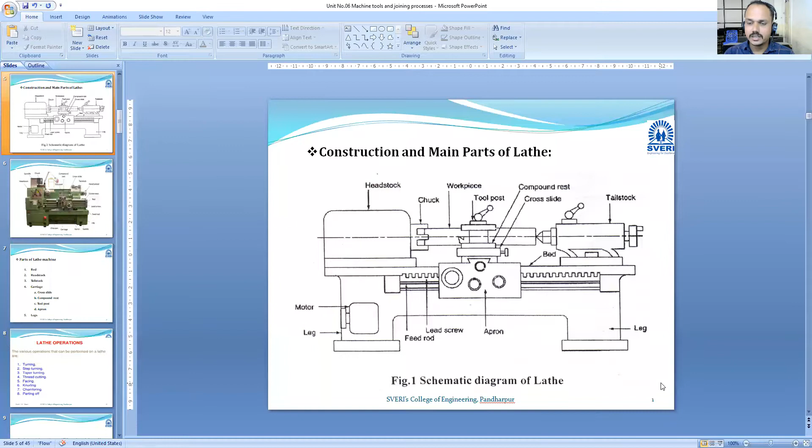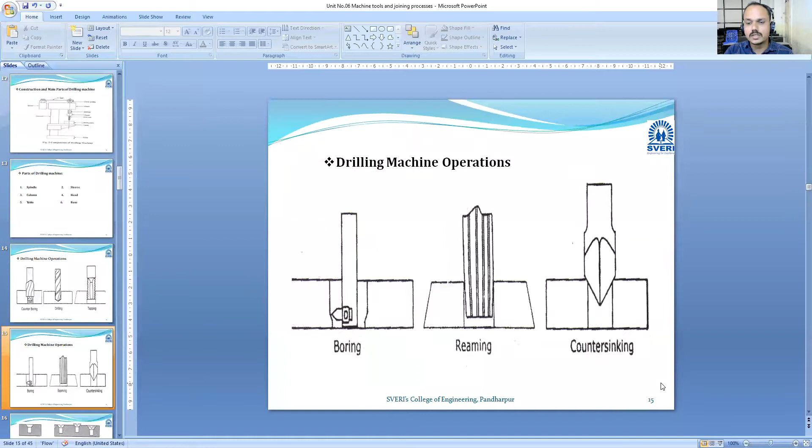Okay, so we will proceed. This is the lathe machine that we have studied. These are the operations which can be performed on the lathe machine. This one is now the drilling machine. These are the operations which can be performed on the drilling machine.

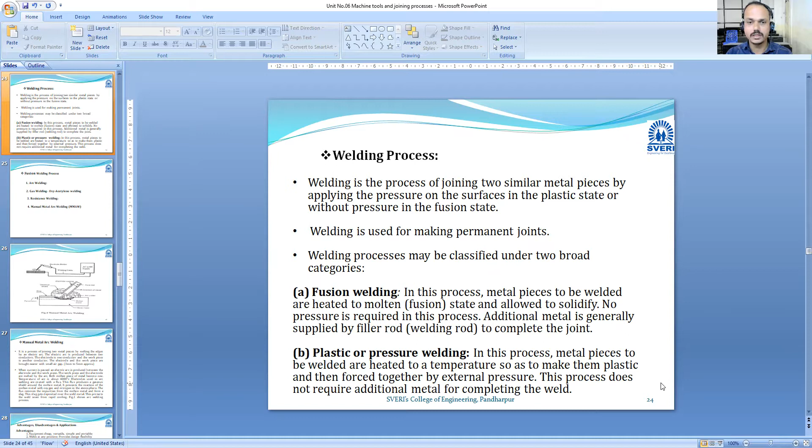Milling machine is not for our syllabus. Then in joining process we have seen welding process - there are two types of welding: fusion welding and plastic welding. In fusion welding there are two main types of joining - the first is arc welding and the other is gas welding.

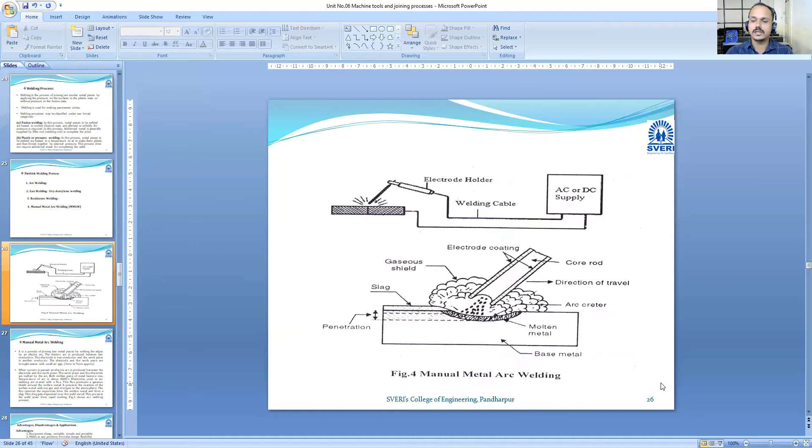But if you see here in arc welding and gas welding, we melt both the workpiece and filler metal also. Is that correct? Yes sir.

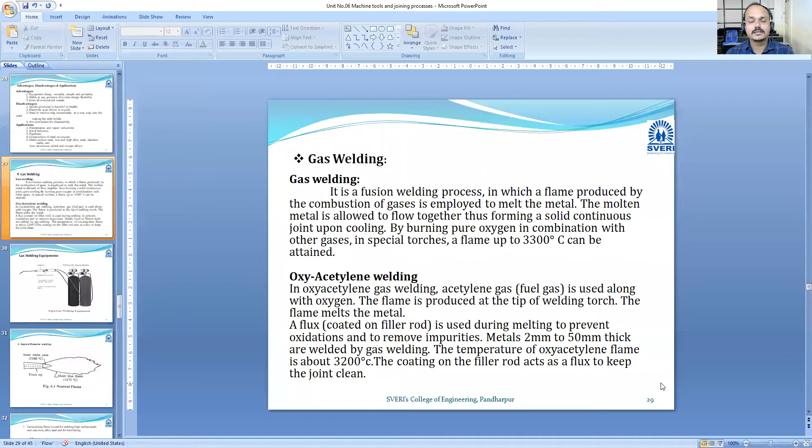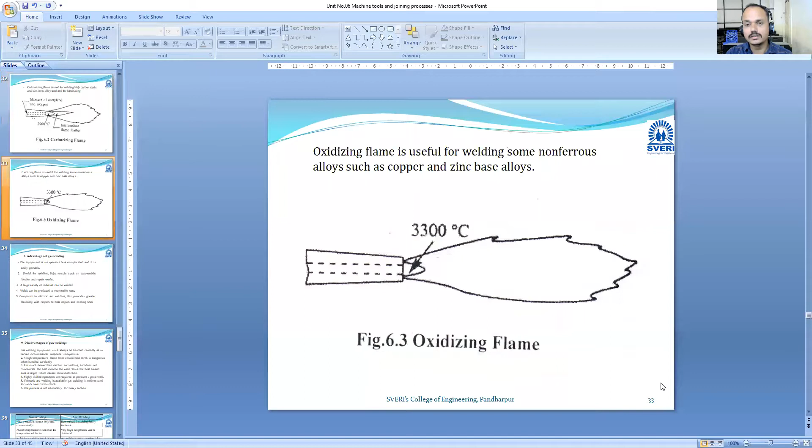So this is gas welding - mostly acetylene is used as the gas to burn. Then these are the advantages and disadvantages.

Now in the previous lecture we have seen one more welding process. What is the name of that welding process? Resistance welding. Yes, resistance welding, very good.

So resistance welding is one type of welding where we are not melting the workpiece, and we are not using filler metal also. Filler metal means, in arc welding we use electrode as filler metal, and in gas welding also we use filler metal. In these processes we melt both workpiece and filler metal.

But in resistance welding, we supply current through the electrode, and by inserting the workpiece or sheet metals in between the flow of that current, it creates resistance, and due to that resistance the sheet metal converts into a plastic state, and by applying pressure we can create a joint.

But this type of resistance welding is not as strong compared to arc welding and gas welding.

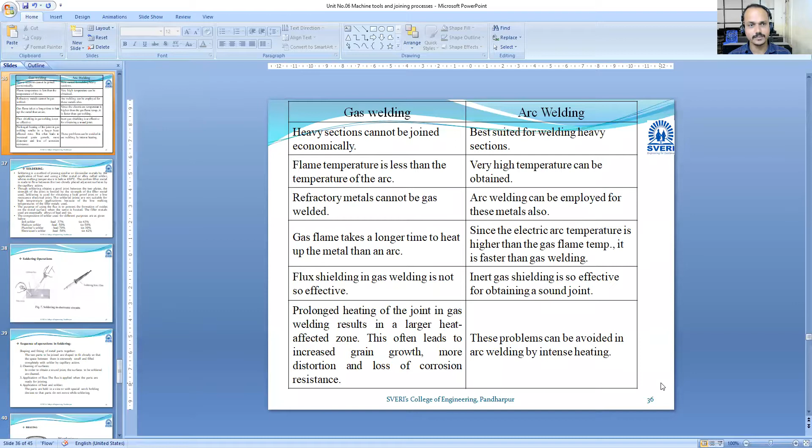Now the next welding type is soldering. Why is soldering required? For example, if there is arc welding and gas welding, why is soldering needed? Because for small workpieces, or for non-ferrous metals like aluminum which has a very low melting point, or mostly in electronics, for example IC circuits, integrated circuits.

To join these circuits, we require to make some dots. There are elements like condensers, resistors, capacitors - small devices which work, and we connect them with the integrated circuit.

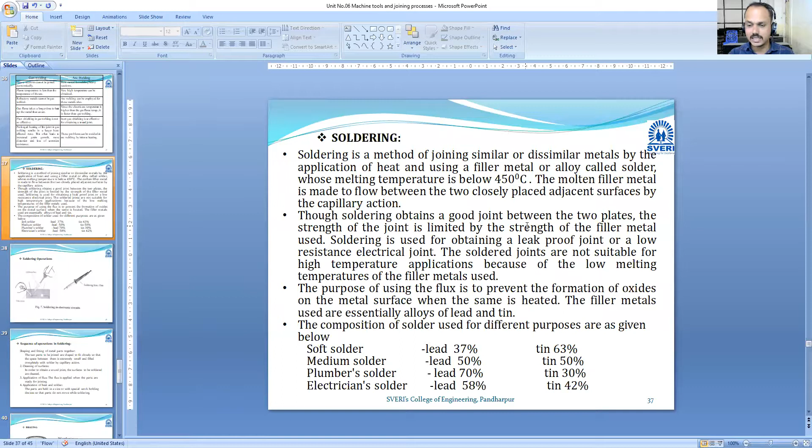Flux is also used here to prevent formation of oxides, but it is not coated with the filler metal like in some other processes. Here flux is not coated on the filler metal, we have to apply it separately on top. Sometimes it is applied, sometimes it is not, depending on the process we observe.

So you can observe here, this one is the soldering gun. This soldering gun is connected to electric current, and this is the switch. When we start this switch, current flows through the electrode and the electrode gets heated.

When I touch the end of that electrode to the wire - this is the filler metal - if I touch that filler metal, the wire gets melted, and then I can put this melted filler metal, suppose between two plates that need to be joined, so these two plates get joined.

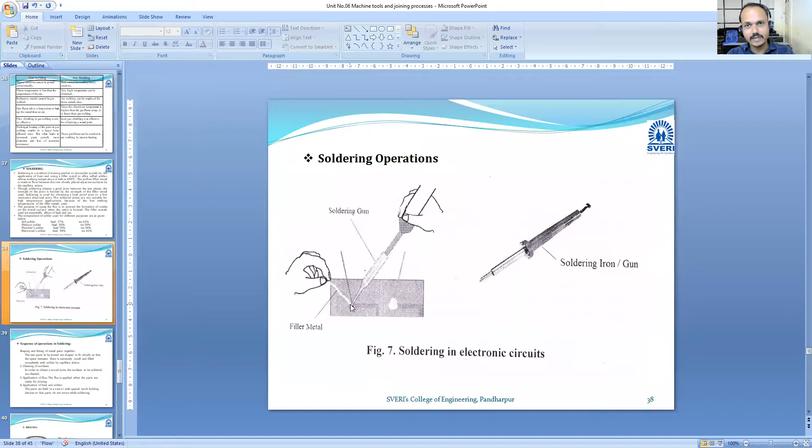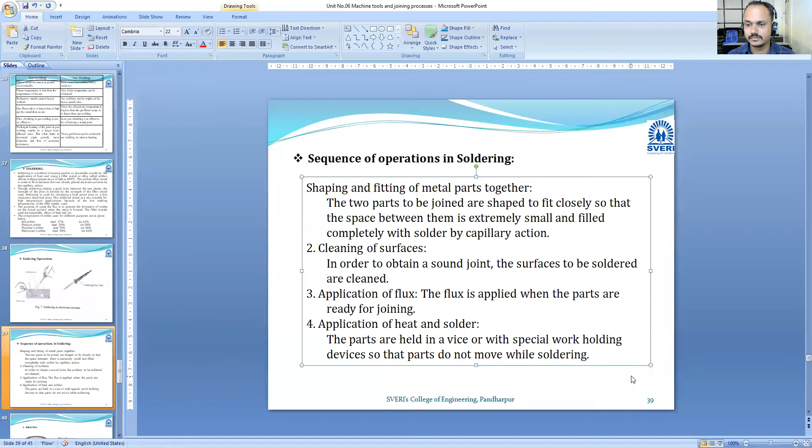Now, after soldering, one more process is there, that is brazing. Brazing is also a process of joining two metals. This brazing is similar to gas welding, the working principle is similar, but it is also used for small joints.

For sheet metals, here also we are not melting the base metal or the workpiece, we are melting only the filler metal. But the joint we get after brazing is stronger as compared to soldering.

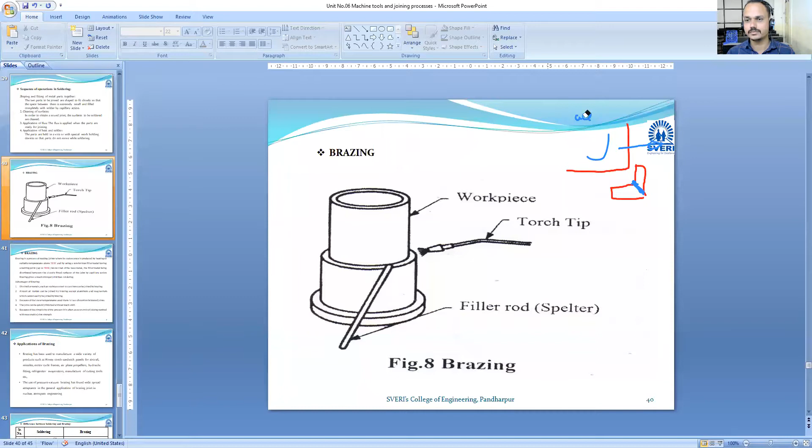Why is it not joining? Because of the properties of that material, they do not join easily with the help of the brazing process. Because of the lower temperature used, there is less distortion in the brazed joint.

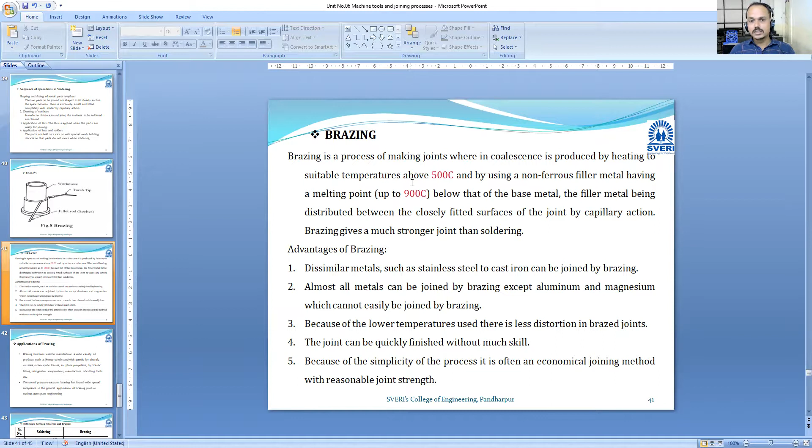So these are the applications of brazing process. It can be used mostly related to sheet metals, products such as honeycomb. Honeycomb म्हणजे मधमाशांचं जे पोळ असतं, त्याच्याप्रमाणे ज्या पेट्या बनवतो आपण मधमाशासाठी.

So we can use this in missiles, in motorcycle frames, airplane propellers, hydraulic fittings. In this process we can use brazing process. There are a large variety of brazing applications, but some are given here.

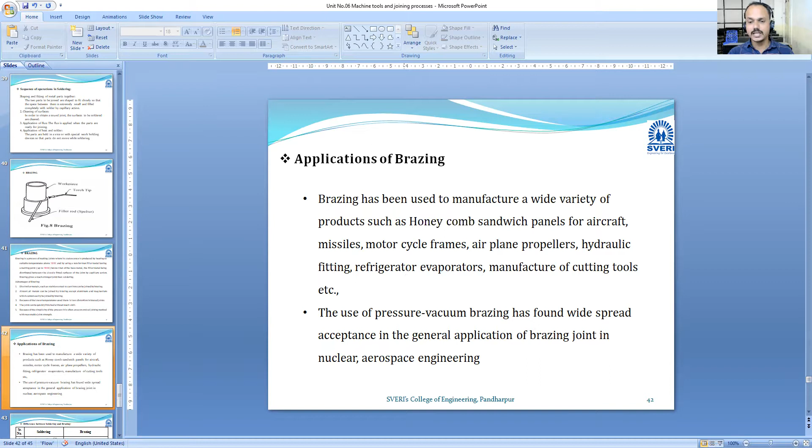Many times what happens, I observe that if I ask if you understand, all are saying yes, but when I ask them, nobody is ready to react or give an answer.

So we will see videos on that, so you get more understanding. This is the comparison between soldering and brazing, that we will take up afterwards.

See, very important thing is that if you do not understand, you have to say I am not understanding, sir. This is the way of learning. If I don't know, I'll say I don't know. We are not God, we are not at a very high IQ level, we are common people in a learning mode. So don't hesitate to ask questions if you don't know - it's not related to BCME subject only, for all subjects.

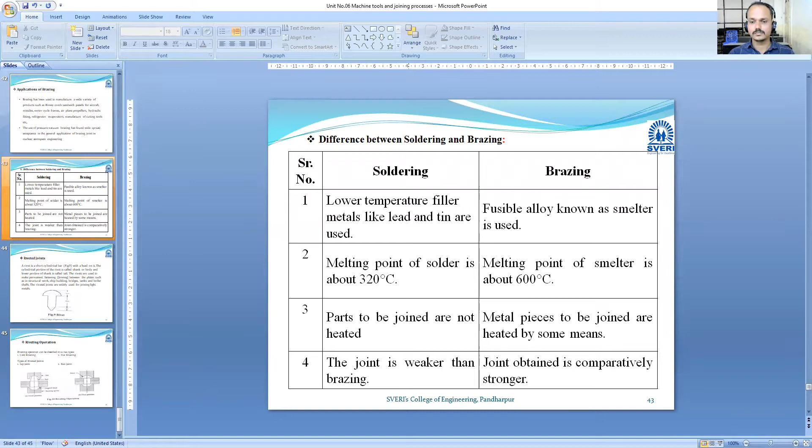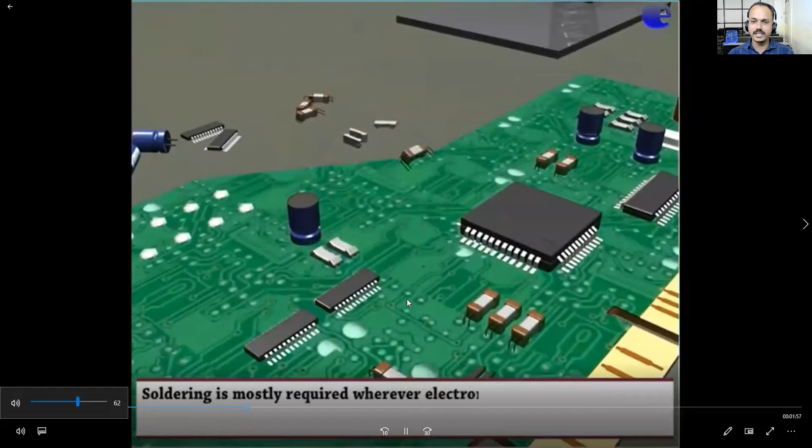So welding, here soldering - first we will see soldering and brazing animations. These are all the equipments. This one is the solder or filler metal. Here we have soldering iron, this is the electrode, this one is the stand. This is an IC circuit - हे सर्किट आहे, त्याच्यामध्ये वायर सारखे पॉइंट्स दिसतात जिथं होल्स दिलेले आहेत, जिथं आपण कॅपॅसिटर, रेजिस्टन्स जोडू शकतो.

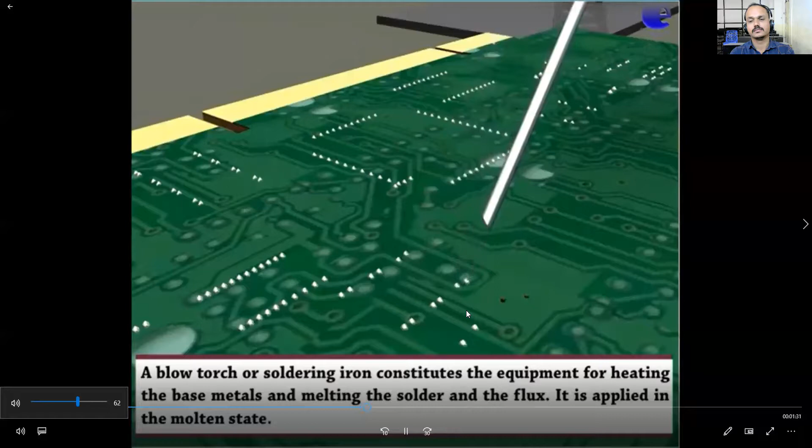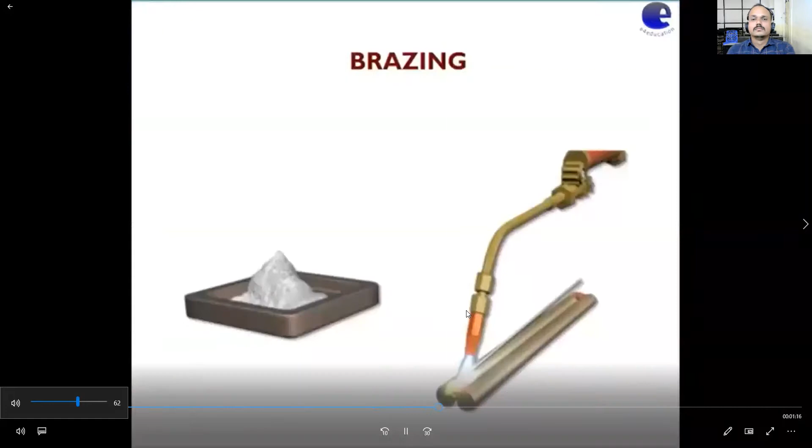This one is the brazing process, torch brazing.

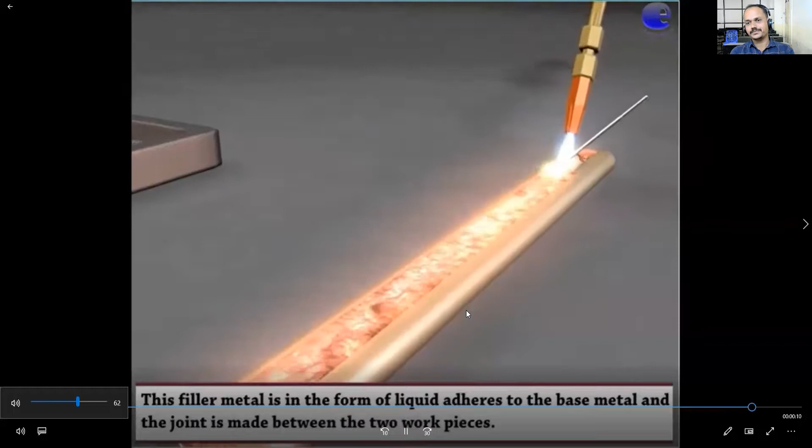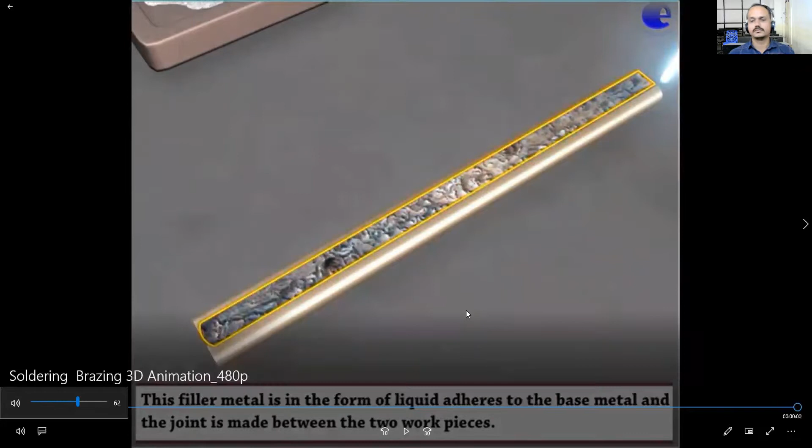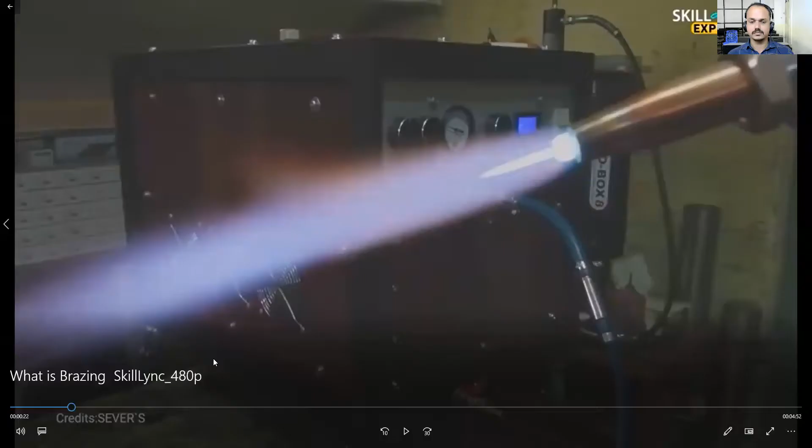समझला? Yes sir. We have one more video on brazing.

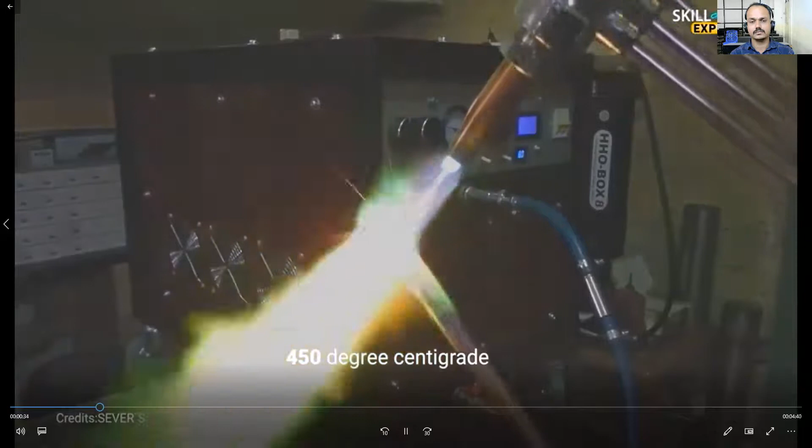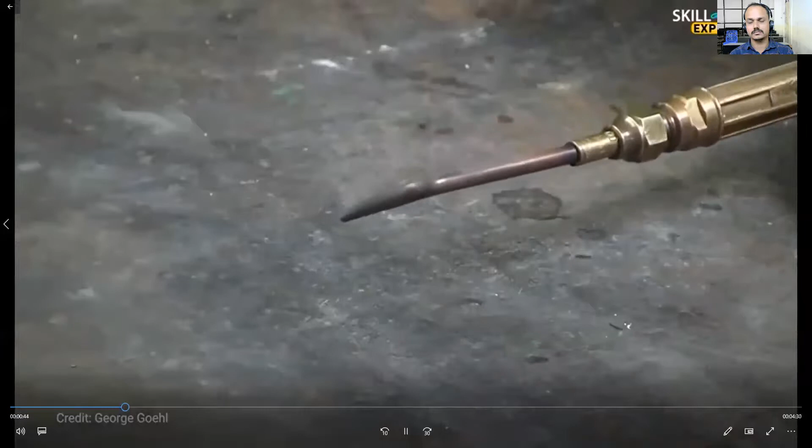Brazing, the filler metal, which is also known as the brazing metal, has a melting temperature above 450 degrees centigrade, but it is below the melting point of the base metal. There are many types of brazing generally available, each with a specific application. The first type we will be talking about today is torch brazing.

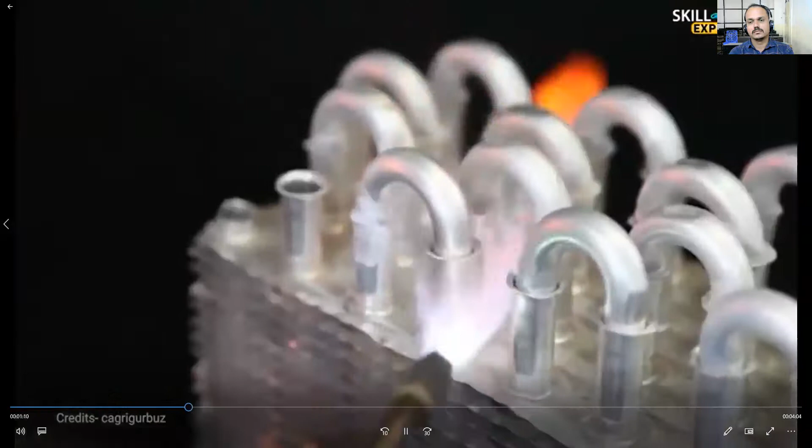In torch brazing, a flux is applied to the surfaces to be brazed. A torch is used to direct a flame against the workpiece and towards the joint. An oxygen-starved flame is typically used to prevent oxidation on the workpiece. Once the joint areas reach suitable temperature, the filler wire is added. Due to the high temperature, the filler wire melts and creates a joint.

The torch used in brazing is similar to the ones used in gas welding. The fuels used in the torch vary based on the type of workpiece and filler used. Acetylene is used if the filler or workpiece has very high temperature tolerance, as acetylene burns at almost 3000 degrees centigrade. Torch brazing is mostly performed manually.

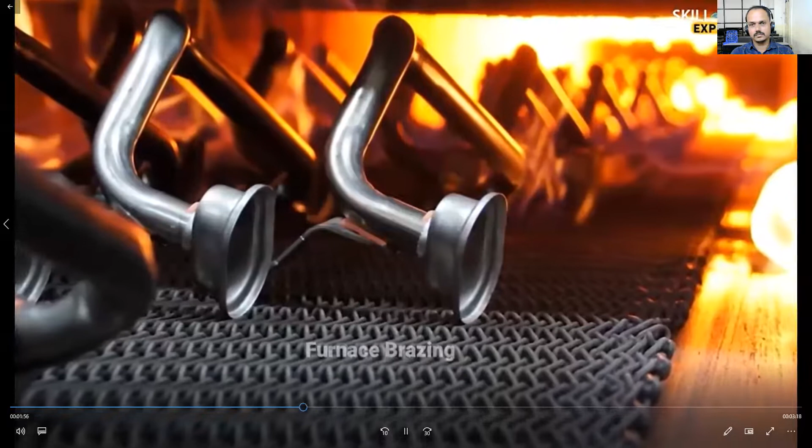The skill of the workers is crucial, as they must be employed to control the flame, manipulate the handheld torch, and properly judge the temperature of the flame. This is done to ensure a proper joint is obtained. Next is furnace brazing - in this type, a furnace is used to supply heat for brazing and is used to mass produce parts.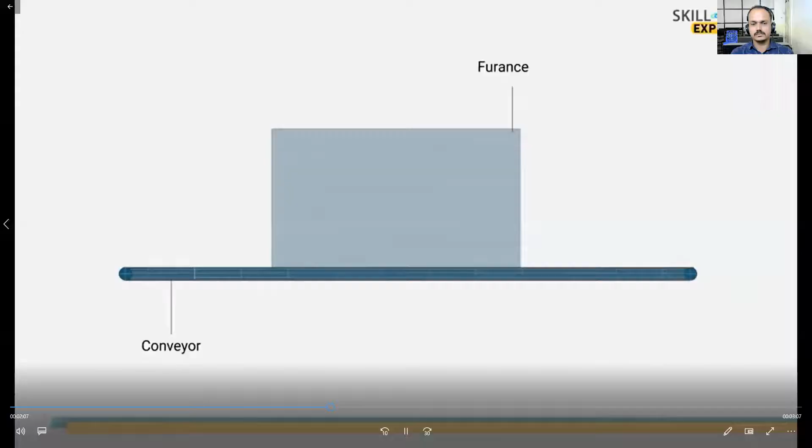It is suited for medium to high production rates of components. In furnace brazing, the parts and the brazing metal are loaded into the furnace. They are then heated to brazing temperature. This melts the brazing metal, which fuses the joints. The workpiece is then cooled and removed.

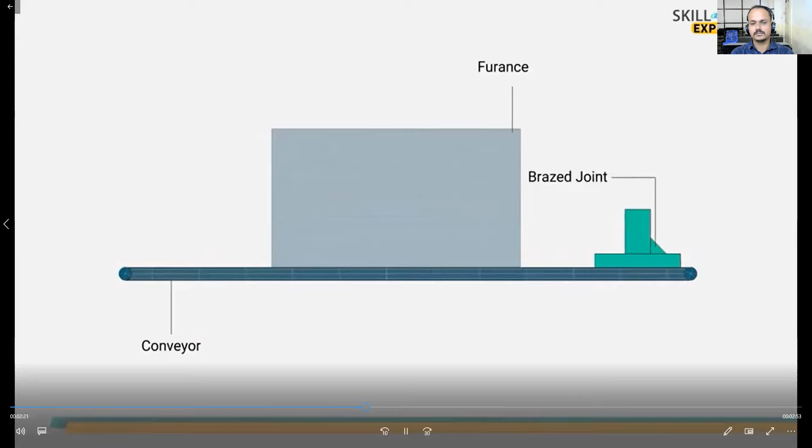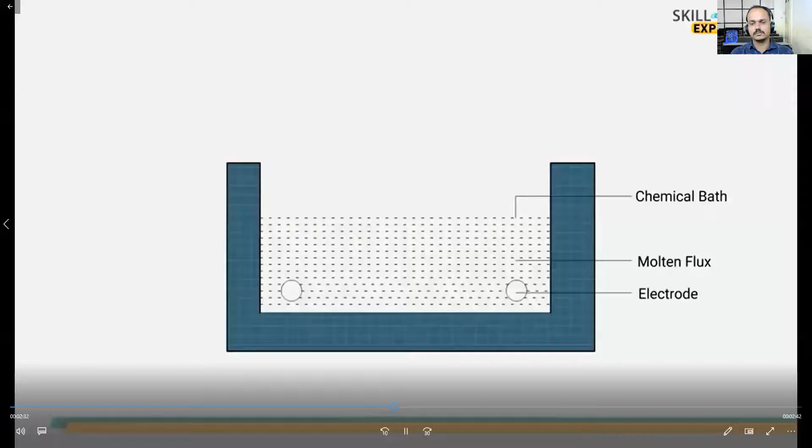The next type of brazing is dip brazing. In dip brazing, a molten salt bath or a molten metal bath is used as a heat source. The workpiece and the brazing metal are immersed in the molten bath. The molten salt bath generally has a molten mixture of fluxing ingredients, whereas in the metal bath method, the filler material which is used to join the workpiece is the heating medium.

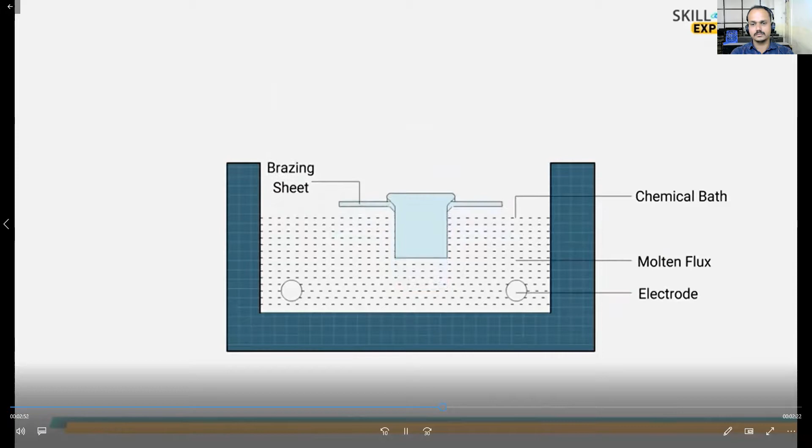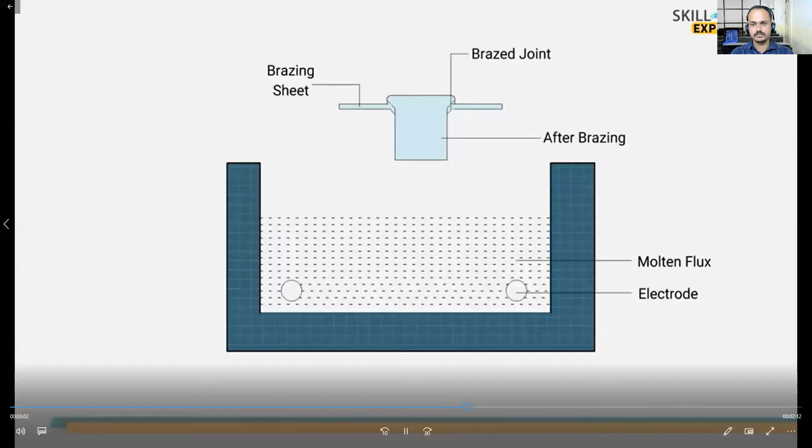The molten metal is drawn into the joint by capillary action during submersion. Dip brazing is generally used where the workpiece has a lot of joints, so by dipping it in salt or metal baths, it is much easier to fuse the joints faster.

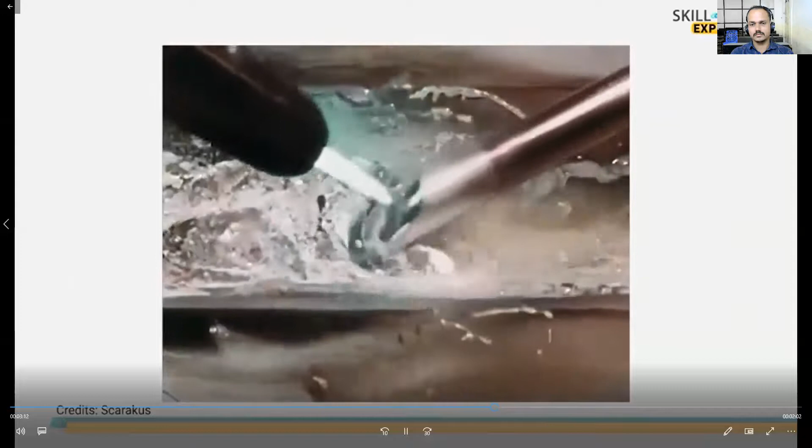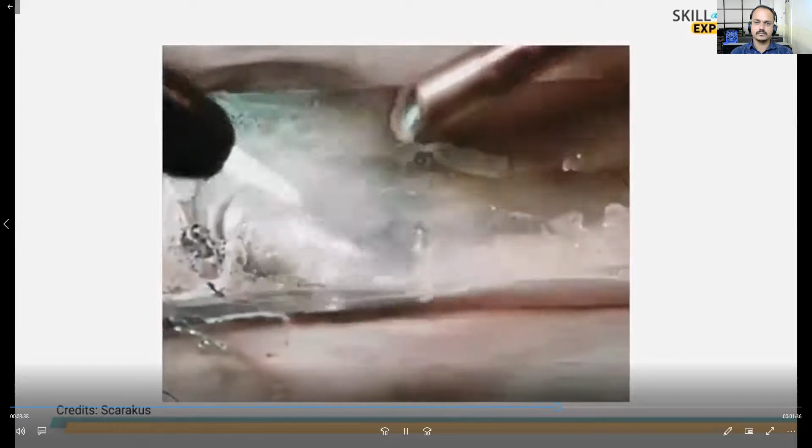The next type of brazing is called braze welding. Braze welding is somewhat similar to gas welding, where a filler wire is used to join two or more pieces of material. In gas welding, both the base metal and the filler are melted and then fused together on solidifying, whereas in braze welding, the joint consists only of filler metal. This is because the base metal does not melt and therefore is not fused to the joint as in conventional fusion welding processes. Braze welding is most commonly used in repair work of pipes, beams, etc.

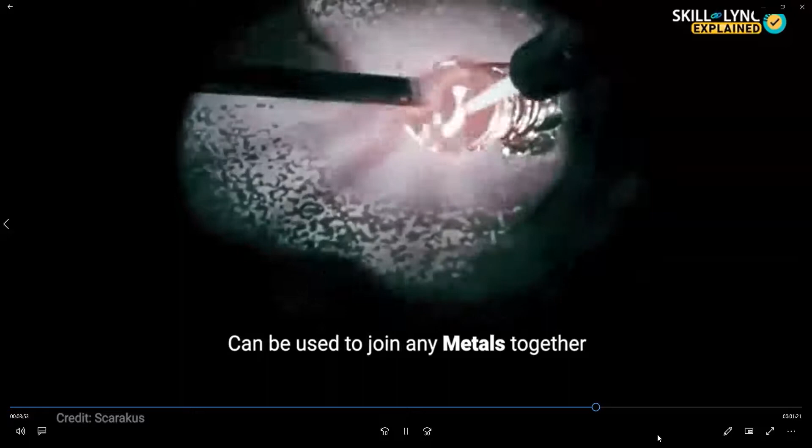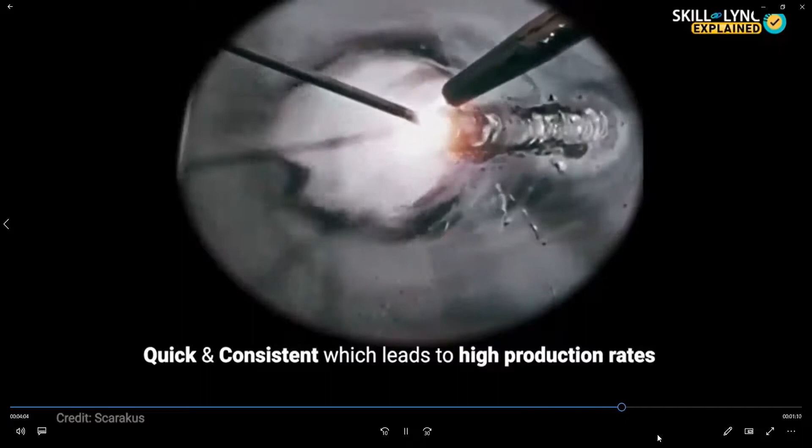Brazing has several advantages when compared to welding. Any metal can be joined with the help of brazing, including dissimilar metals, whereas this is not possible in most welding types. A few brazing methods like furnace brazing and dip brazing can be performed quickly and consistently. This permits very high production rates and allows the process to be automated. Some methods also allow for multiple joints to be brazed at the same time.

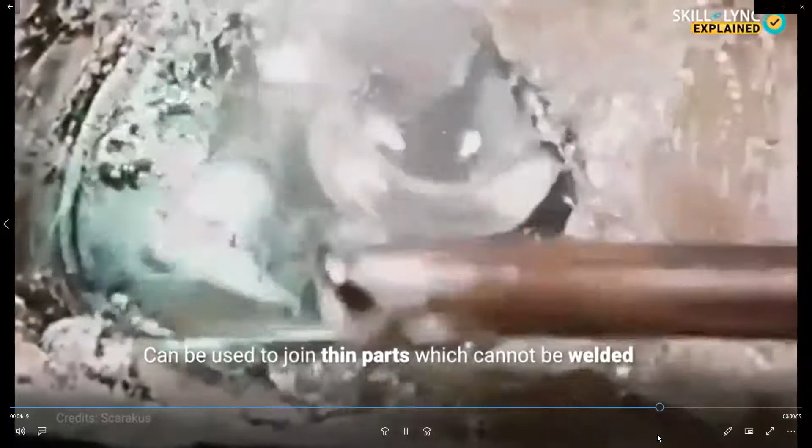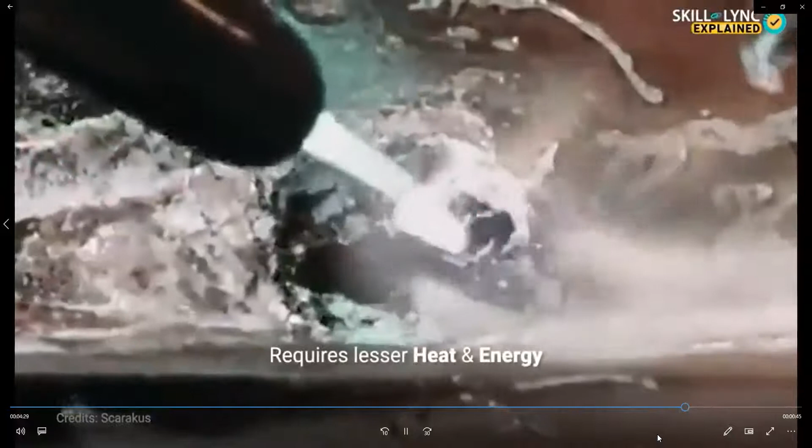Brazing can be applied to join thin parts which cannot be welded. This is normally done by infrared brazing, where an infrared lamp is used to generate heat. Brazing in general also requires lesser heat and power than most fusion welding processes.

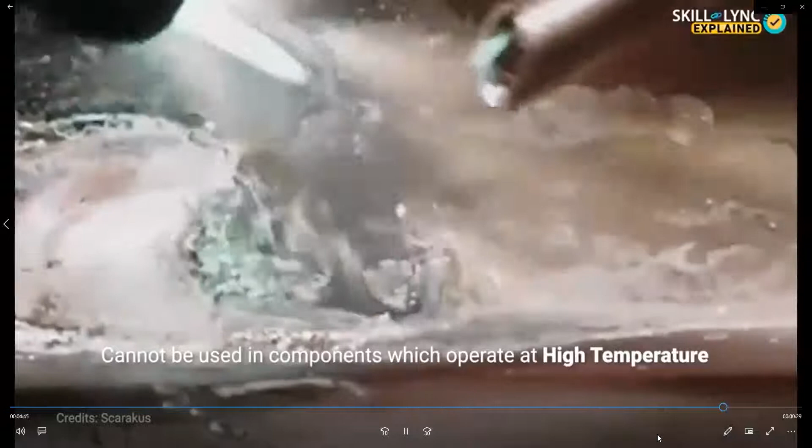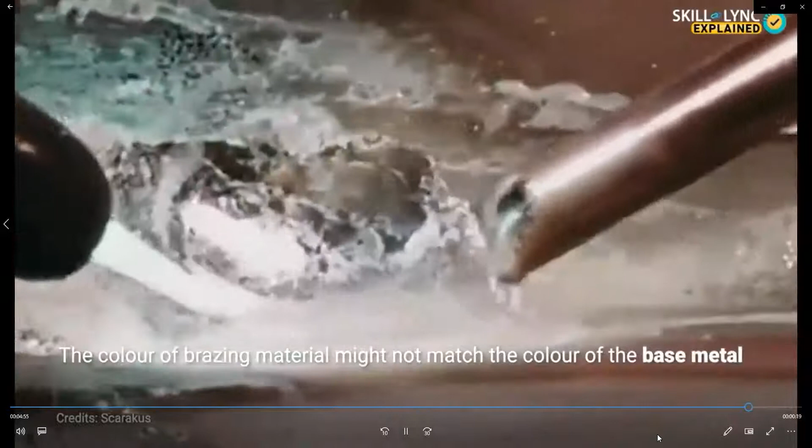But the downside to these advantages is that the strength of the brazed joints is lesser than the welded joints. Brazing cannot be used to join components which are required to operate at locations with high temperature, due to the low melting temperature of brazing metals. Another intriguing disadvantage of brazing is that the color of the brazing metal and the base metal might not match sometimes, which might not be aesthetically pleasing at some places.